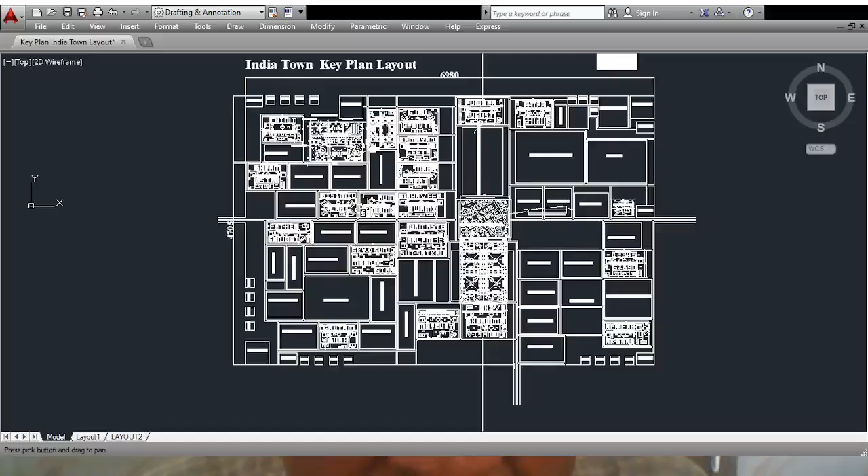You can see this drawing. In fact, this is not a miraculous drawing, a very easy drawing it is, and it is very easy in a way that we have to get an idea of this.

Where is it? Yeah, this is that design, I showed you this last time. I named it India Town. It's not mandatory to keep this name, you can keep whatever name you want. It's up to you, but accordingly it has been done, because I planned to carry out this job long back through someone, but that time finances could not be arranged by that promoter, and I tried this in 1993 or so, I think.

At that time I did not add anything to those, only a few. You can say this is a big complex, a big city, not metropolitan, not like an international city, an ordinary city it is, which has got many integrated complexes. Well, you know what is an integrated complex? Integrated planning means every area should be comprehensive.

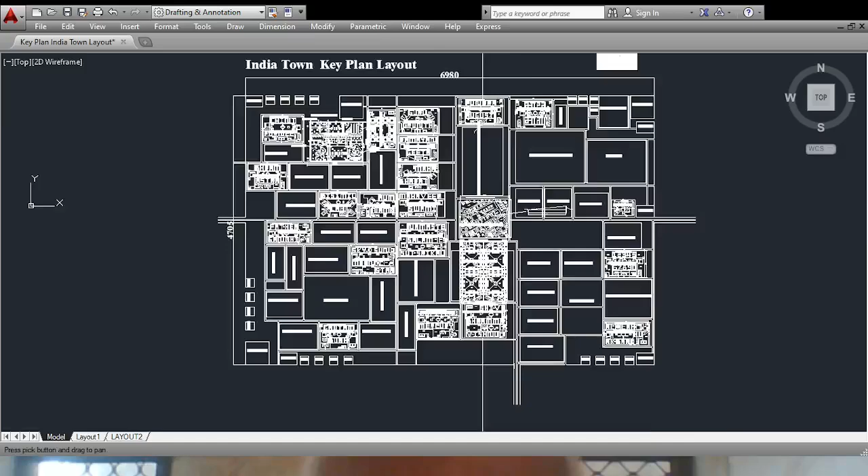For example, I can show you like this. Say this is an area requirement, and in this there are buildings which look like, if you see from top, India is a beautiful nation. And also this another, many I put, many I didn't put. Other one is here, for example, this is the other one.

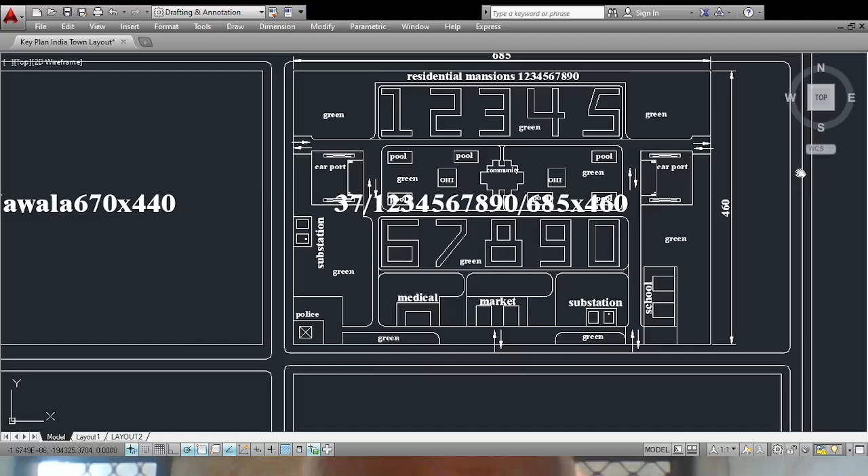It is in letter forms, counting 1 2 3 4 5 6 7 8 9 0. This is that one. And also here, if you see very significantly, for example, this is here. If you see, maybe you can say, I'm not sure, but I don't think you'll find a problem in this.

It's Shiva, Brahma, Vishnu.

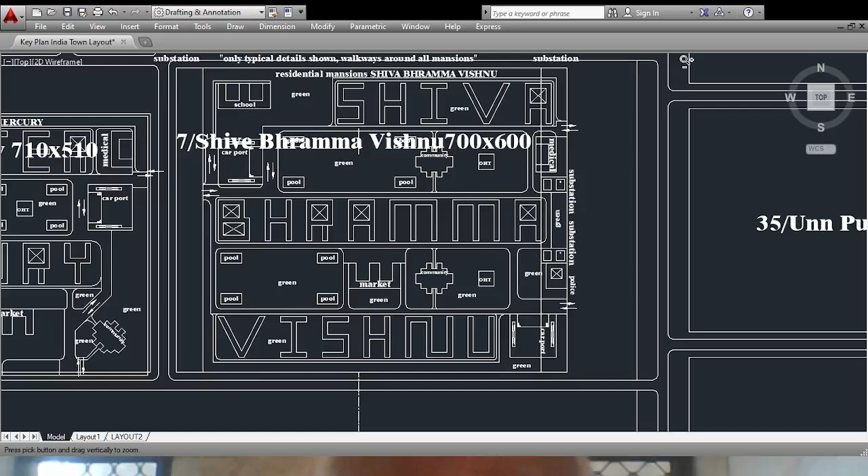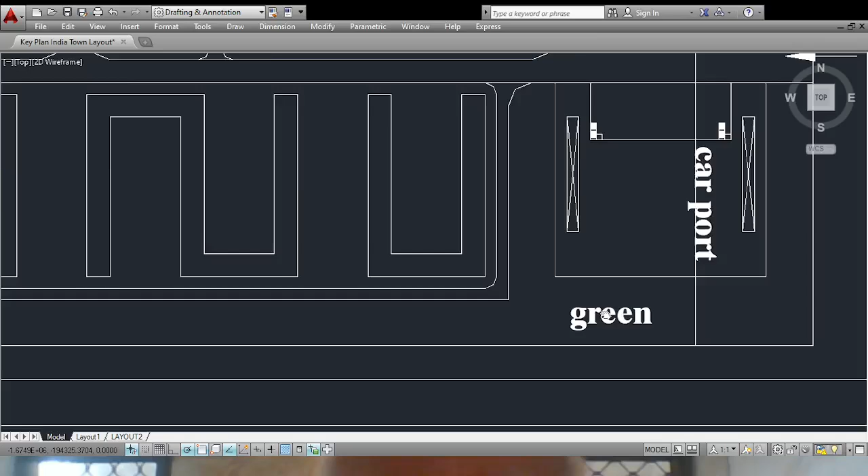Then there are, here you can see so easily, it is a carport. Carport means multi-level car parking. According to requirement, I have put one carport here, and also others are there. For example, you can see here, this other carport. And these buildings are there, they are market, local market you can say.

There's a community hall or community center, overhead tank. Likewise, school is there, and also market is there, as I showed you, and police station and substation. These are there, so the people should not have to go far distance for local purchases.

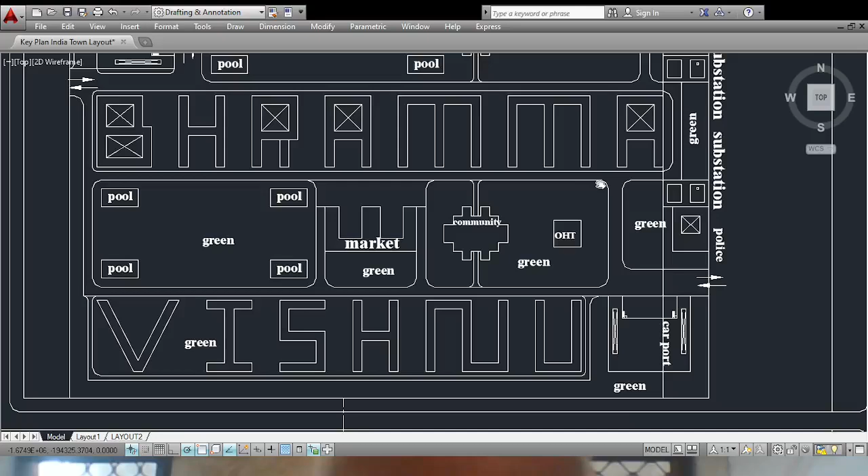And not only that, most important point in this is, I have given allowance in area, much allowance in area for purpose of natural cycle of environment. Green areas around, I'm sure 80% is green area on this plot, for example, and others are the building area.

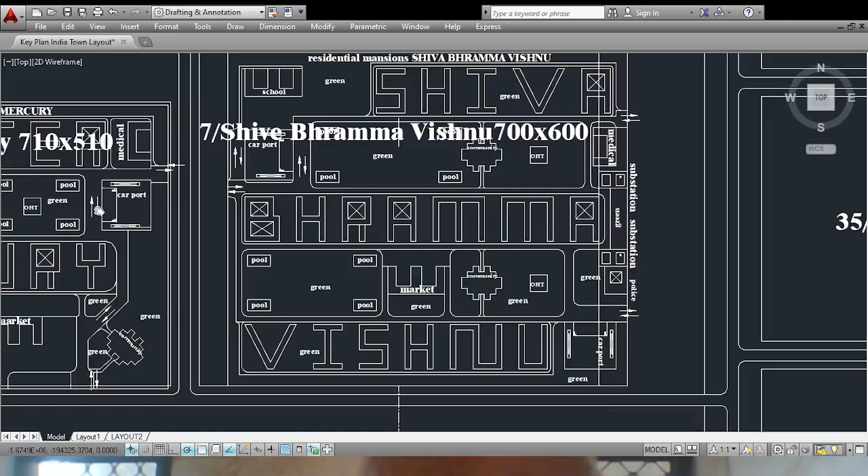Same way, no building is connected together. All are located away from each other, so that there should be no problem - if suppose there is a problem in this building, it should not strike this building. Suppose there is earthquake impact, it should be independently handled, and people must have access between every building around. This means air circulation is successful.

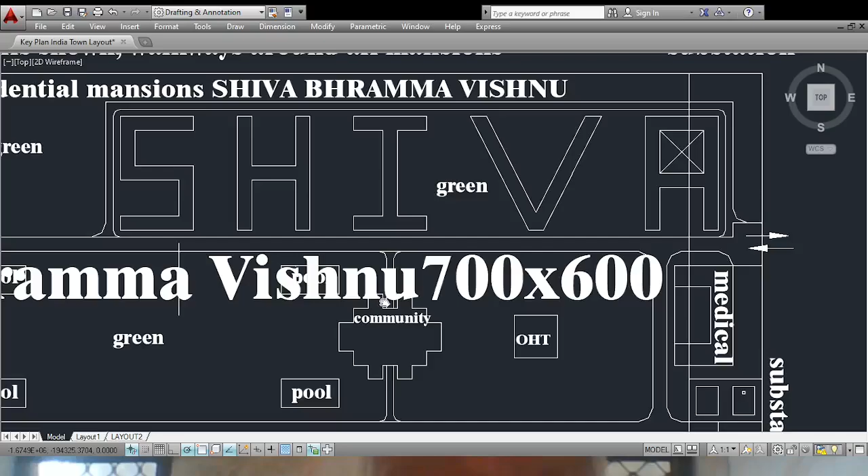It's for all buildings. Here is Jupiter, Mercury. You may say it's also the same. Mercury and Jupiter are there.

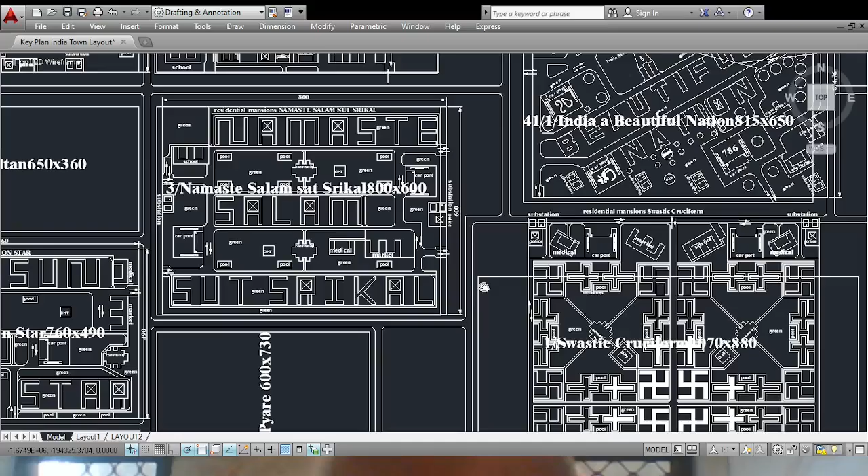Letters are same facilities, same surroundings. And here is Mahavir Swami. Whatever came to my mind, I just tried to accommodate. And here is Mahabharat.

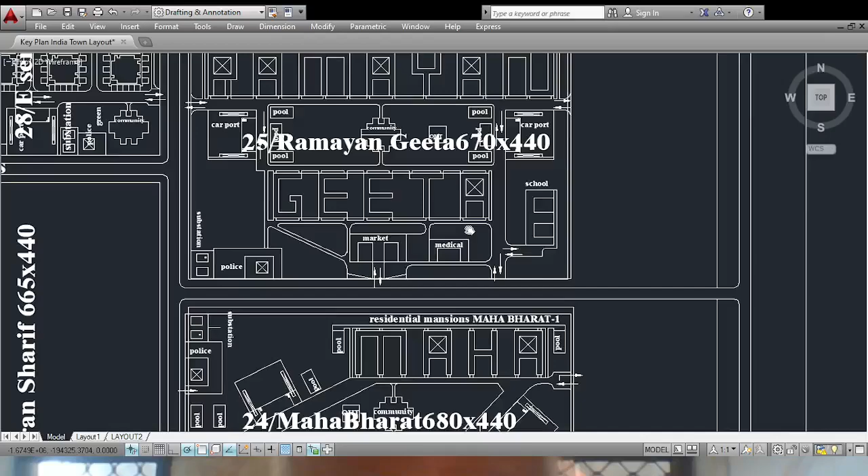Then there is, of course, another design of Mahabharat. This is Ramayana, Gita. And furthermore, you can say Guru Granth. Guru Granth, G-U-R-U-G-R-A-N-T-H. And here is 15 August in Hindi.

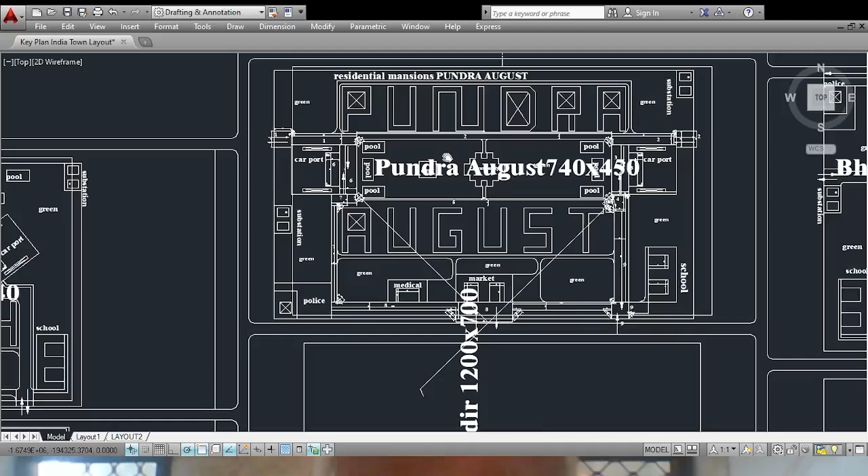15th August - Pundra August, 15 August. And here, in Hindi, it says Bharat Mata. Others I did not put because of shortage of time.

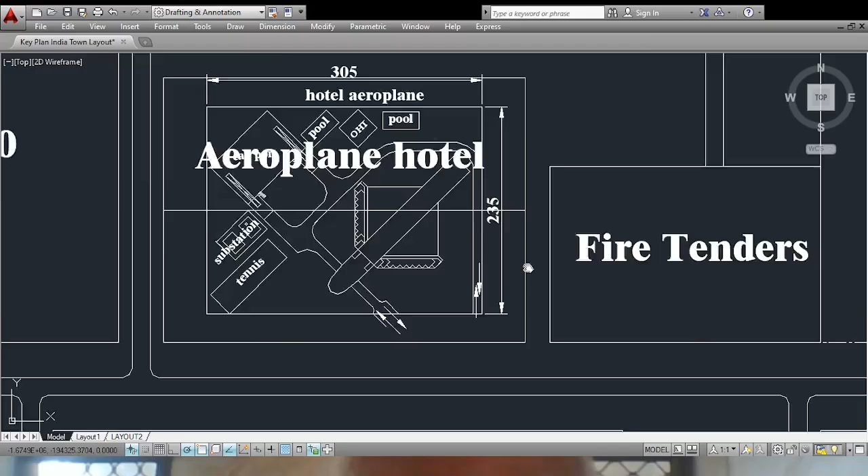And there is an area which is, let us say, shaped like an aeroplane. You can see that one. And here is...

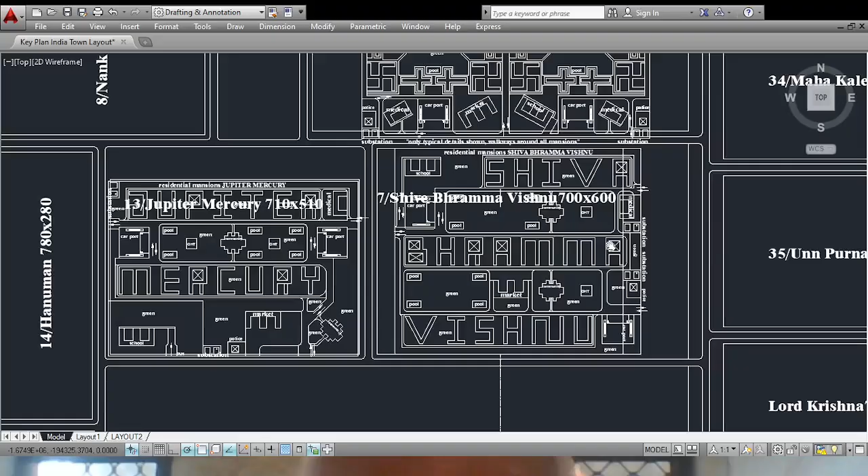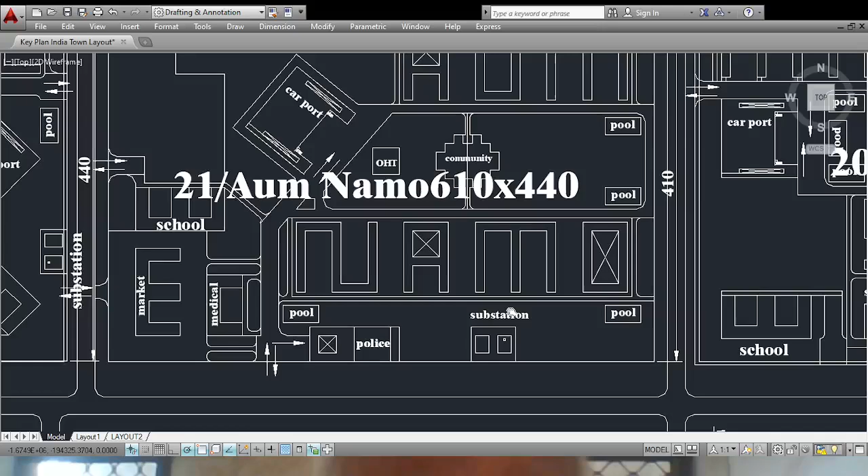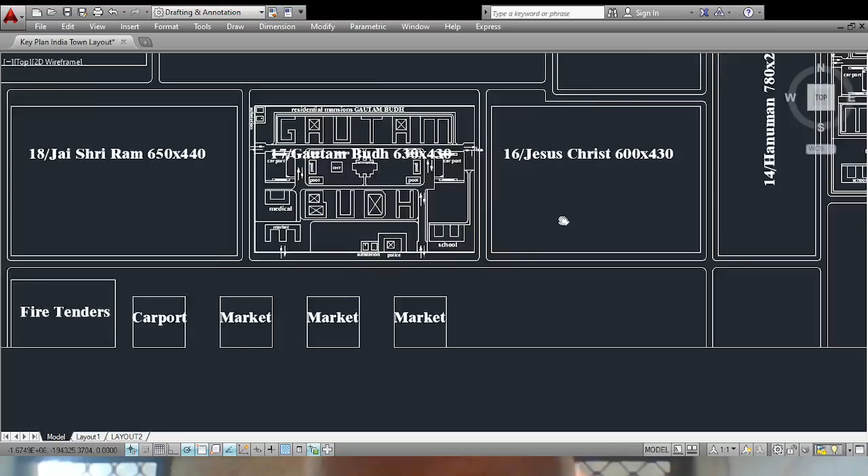Allahu Akbar, you know this slogan, God is great. And here is Shiva Vishnu. Now here it is Jupiter, Mercury, and it is sun, sky, sun, moon, star. You know meaning of all these. And you may say here Aum Namo. Typical arrangements are similar, components are similar, arrangement is different. Aum Namo, here is Bismillah. And here is Father Gandhi, and also here is Gautam Buddha. Others are, I have to put them just for information.

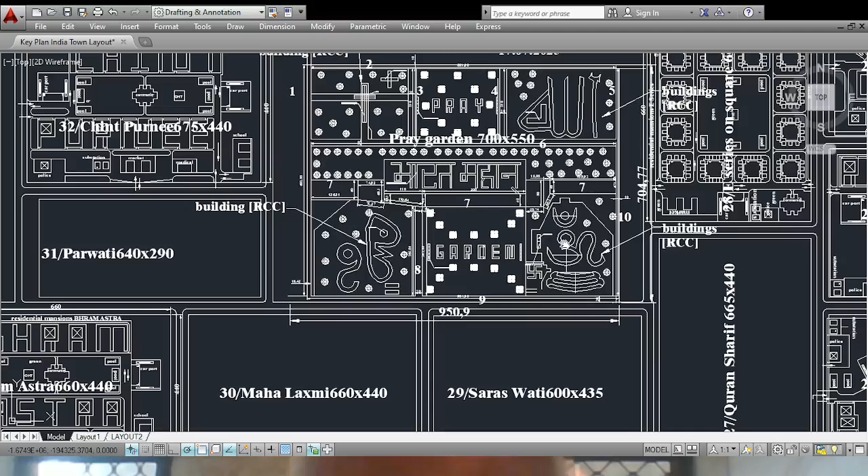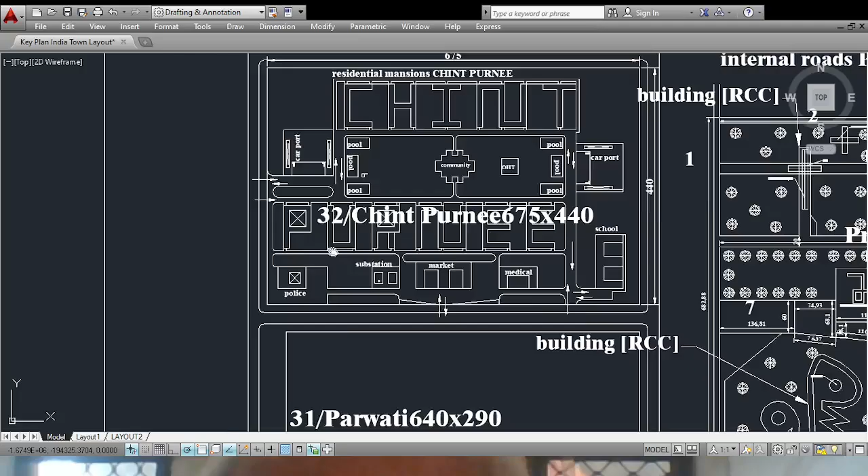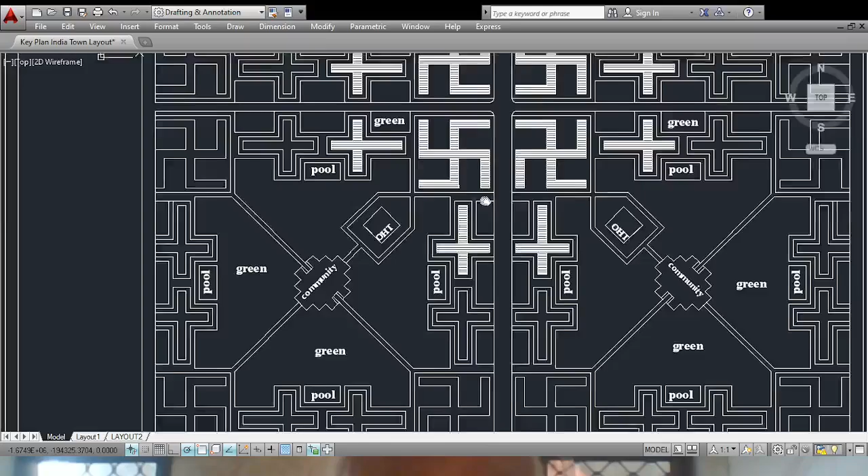And also if you go into much more, here is one Chint Purnee Devi, and similarly here is one general hospital. I have not included here yet, but it's available in designs. And we have here, this is new one I was just doing, this is swastik cruciform, cruciform, and this is swastik. Others are left yet to be done, which we have to cut the time. I can say approximately 55 complexes are there in this, with one India town, India, a beautiful nation, and few more are there.

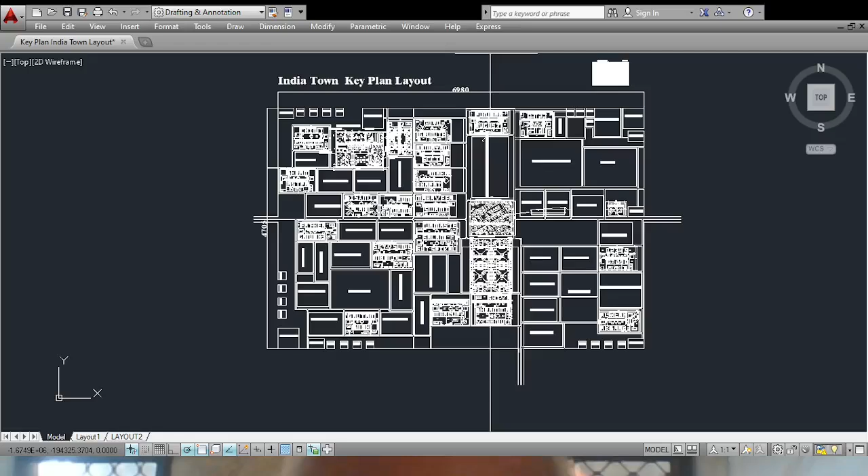Now I'll go to other file, which is also very, very interesting one, and this is quality for lectures. This file you know already. For me, quality is top priority. If this project remains successful, somebody starts to promote it, I would say this is the most important project for me, because it is a different type. Lot of work is to be done in that. Cost is also there, so many buildings in this, more than 1,000.

And there is no way that we can say quality and coordination can be disregarded. We can never say that. There is no way that this can be disregarded. We cannot say anything like that. You cannot disregard anything as far as that is concerned.

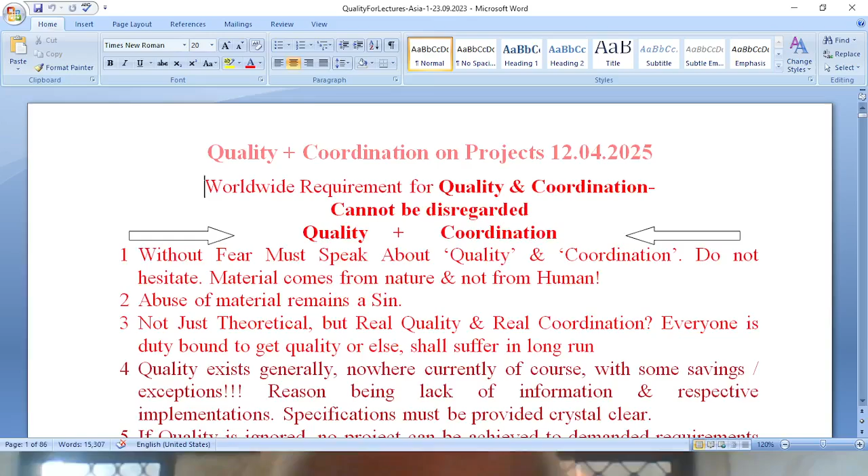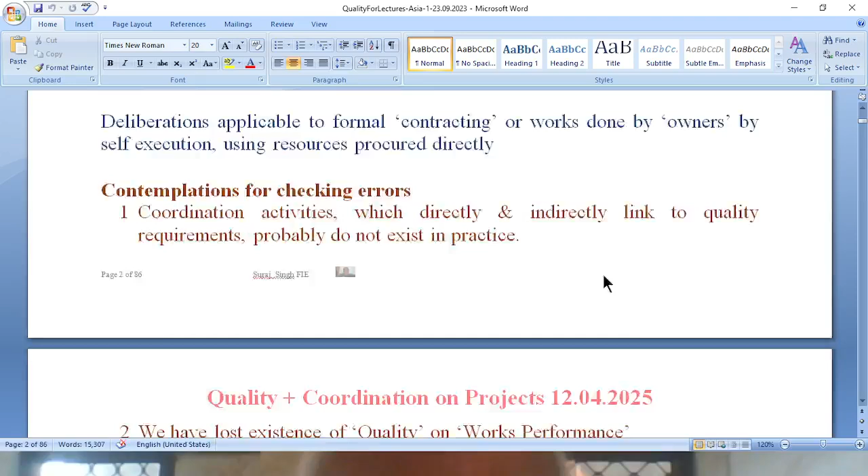Here some notes are there in this, and some glimpses of few projects only here which I have done. There are many more, but for example I did a drawing here, for example here it is, you will say this is a formwork drawing of a lift construction, and let us say I'm saying contemplations for checking errors, meaning the coordination activities which directly and indirectly link to quality requirements probably do not exist in practice. We have lost existence of quality on work's performance. That is my worry, my concern, that we are not serious. We have lost existence of quality on work's performance.

Quality, as far as quality is concerned, I am very much serious. I wrote, you can say before, long back, some procedure, some book on site works that was published in 1996. Of course, this did not go well because professionals are not good in reading books which are of practical use except which are mandatory, and that book did not work well, it's sure. But what can I do? I do not know. Let me show you at least. I'm not promoting anything, just for information. I'm not promoting anything, I'm just trying to see, because it is something, I'm not interested in promoting anything, but I don't think that you should mind that.

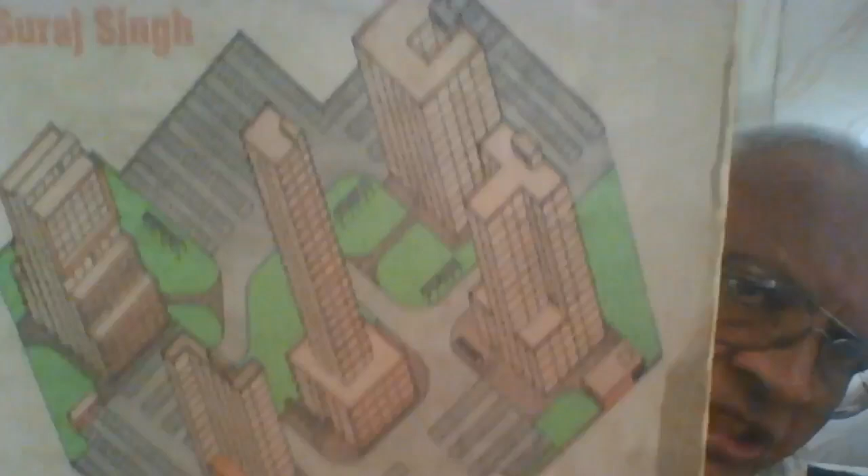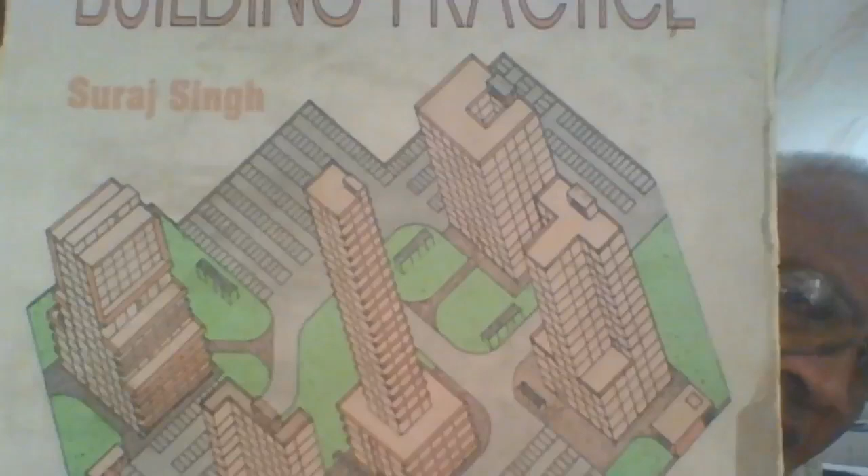Here is, I'm talking about one of these. Of course, this was written by me in 1992 when I came from Iraq. This is Iraq and Doha, Qatar. I came back from Doha in 1989, and I tried to gather my experience, and its title was Civil Engineering Building Practice. You can see that one. You must have seen somewhere on net, though you just cover. This content is more than 500 pages, and many sketches are there. This is a sketch I drew, and also there are so many sketches in that one.

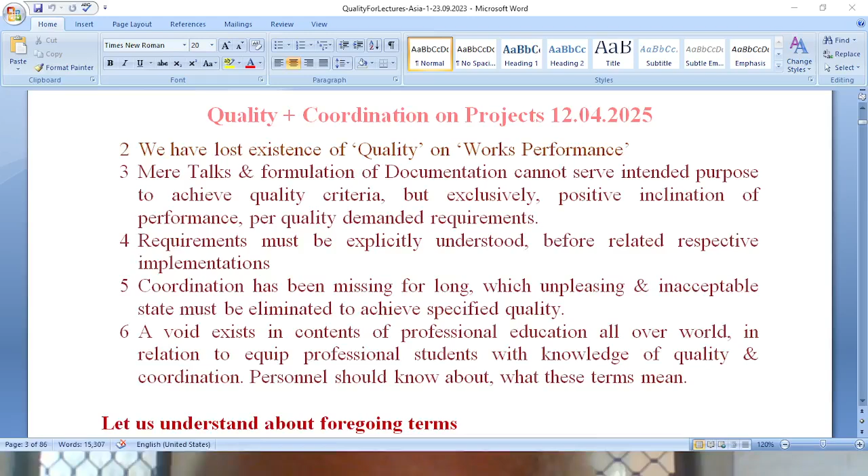This did not do well. I don't mind that if it doesn't do well, but that's not an issue here. Issue is what should be done if people don't care, that's the point. I wrote in that how work is done, what is coordination, what is liaison, what are duties of those who work on sites, what are duties of those who don't work on site. Everything is included in those days. Of course, it's not like today.

Here what I'm saying is, we have lost existence of quality on work's performance. This is very much, you can say, a challenge. I can say challenge, you must accept it as a challenge, because quality is there in name only, not in physical life. Mere talks and formulation of documentation cannot serve the intended purpose to achieve quality criteria, but exclusively positive inclination of performance per quality demanded requirements. Requirements must be explicitly understood before related respective implementations.

Coordination has been missing for long, an unpleasant and unacceptable state that must be eliminated to achieve specified quality. A void exists in the contents of professional education all over the world in relation to equipping professional students with knowledge of quality and coordination. Personnel should know what these terms mean.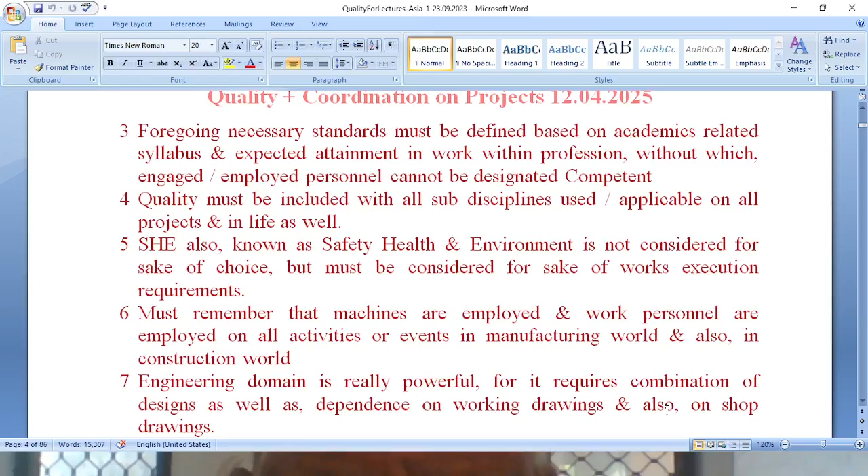Safety, health and environment, also known as SHE, is not considered for the sake of choice but must be considered for the sake of work execution requirements. We must remember that machines are employed and work personnel are employed on all activities or events in the manufacturing world and also in the construction world.

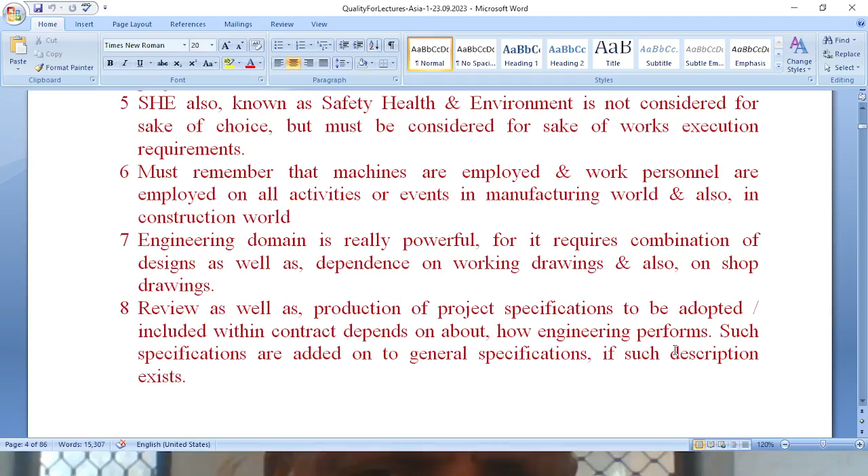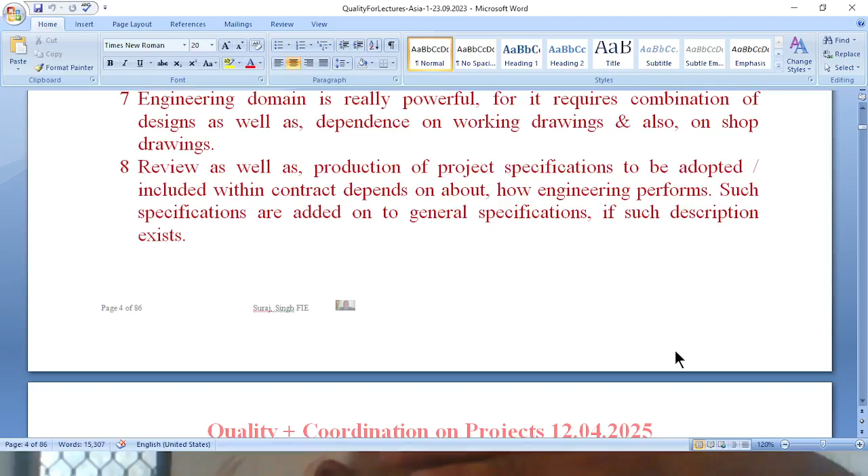The engineering domain is really powerful, for it requires a combination of designs as well as dependence on working drawings and also on shop drawings. Review as well as production of project specifications to be adopted, included within the contract, depends on how engineering performs. Such specifications are added onto general specifications if such description exists.

Construction domain is like the prime vehicle on a project.

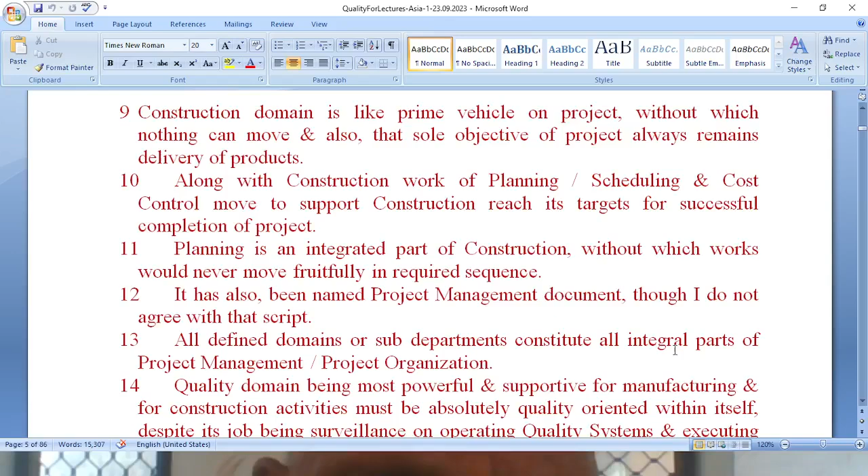Along with construction, work of planning, scheduling and cost control move to support construction in reaching its targets for successful completion of the project. Planning is an integrated part of construction, without which works would never move fruitfully in required sequence.

It has also been named project management, a document, though I do not agree with that script. All defined domains or sub-departments constitute integral parts of project management, project organization.

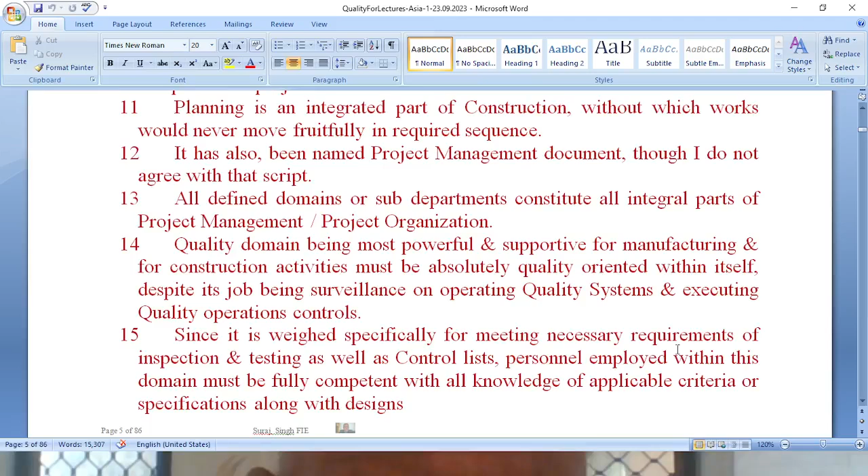Quality domain, being most powerful and supportive for manufacturing and construction activities, must be absolutely quality oriented within itself, despite its job being surveillance on operating quality systems and executing quality operations controls.

Since it is weighed specifically for meeting necessary requirements of inspection and testing as well as control lists, personnel employed within this domain must be fully competent with all knowledge of applicable criteria or specifications along with designs.

Everyone has to stop sleeping. This is very important because generally we have been sleeping. Everyone, stop sleeping and attempt seriously to achieve reliable quality and reliable coordination, which are required to be my and everyone's friends. Because I and others cannot satisfactorily work in the profession without these both domains, for these are not considered absolute domains but supportive and inclusive ones.

Real quality and real coordination we have to be very serious about. These are all friendly domains together for all others.

Demanded quality is a question mark here because quality can never be uniform. It depends upon what is specified. You cannot leave me, because you are my destiny and the nation's destiny as well. And if it is the nation's destiny, this means developed destiny for the entire world.

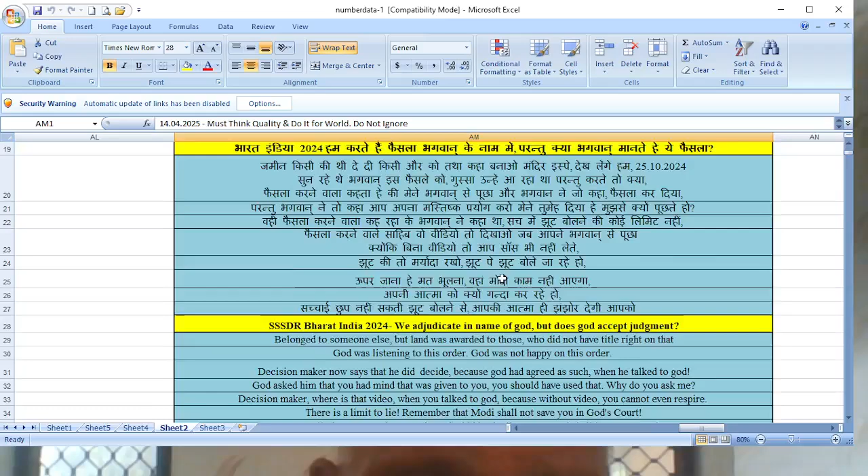You are not dealing with data, you are going to deal with yourself. And that is yourself, doesn't mean personally, professionally - I am talking that one. And that is a very, very important part. This part we should be clear about because of so many issues we are handling this. We should be clear about this.

And if you want to change something in procedure, you have every right with agreement with all responsible stakeholders. I'm going to change this and it should meet quality procedures, because there can be many methods for one activity to be carried out, provided system is okay, specifications are met, requirements are met, time is saved, cost is saved. And that's called, you may say, value engineering.

If you can save time, it's called value engineering. If you can save material, it's value engineering. You can say you can save budget also, and give better performance, and also by your way others can learn.

Lessons must be learned. As much learning as you can provide, you provide, because you are not just an engineer, you are working for universe on earth, for using in a best way, optimum way, natural source which is available within earth. That point we should keep in mind.